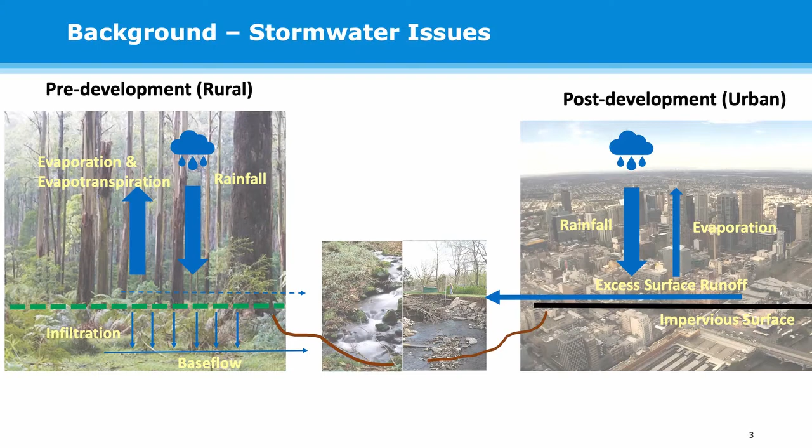Just to start with some stormwater issues, in the natural environment on the left-hand side, the rainfall is largely infiltrated through the pervious surface, such as grassland, and forms the environmental baseflow downstream. Only a small amount of water remains as surface runoff. However, in contrast, in the urban environment on the right, this natural water cycle is heavily damaged and changed. The impervious surfaces we build, such as roofs and roads, stop that infiltration process. Most of the water becomes surface runoff, and this not only causes serious urban flooding issues, but also depletes the environmental baseflow and damages the natural habitats.

One solution to cope with these changes is using stormwater control measures, such as rainwater tanks. Rainwater tanks have multiple objectives. Conventionally, they are a source of water, collecting the roof runoff and supplying the water needs in the house. Because they reduce the amount of roof runoff, they also have simultaneous benefits of mitigating the flooding risk in our urban environment. By installing a small trickle release to these tanks, making a passive release system, they can also restore the baseflow for our streams.

However, we're increasingly seeing real-time control or smart technology applied in our water assets to make them smarter. So one overarching question for us is, can we enhance these benefits by making the static rainwater harvesting systems smarter using real-time control technology, and enhancing all the benefits, especially the baseflow?

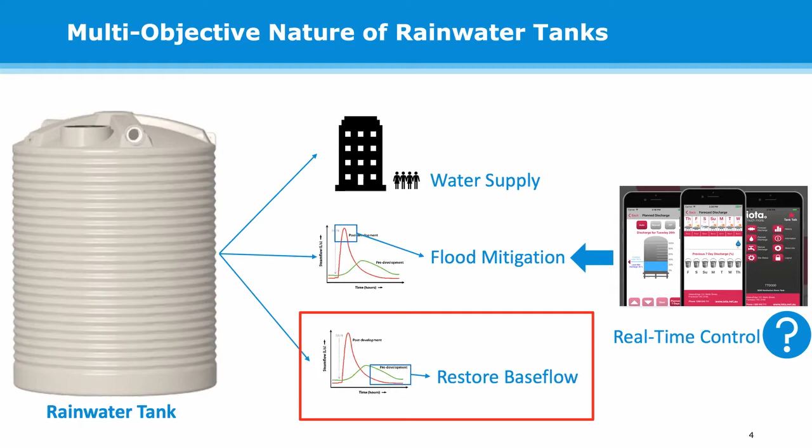So we design a smart control, and how does this system work, you may ask? So first of all, this system normally harvests the rainfall forecast data from the local Bureau of Meteorology. By receiving this forecast, the system would review the tank levels and ask whether this forecast rainfall would fit in those empty spaces. Then the system would start calculating whether you need to empty additional room to contain those forecast inflows.

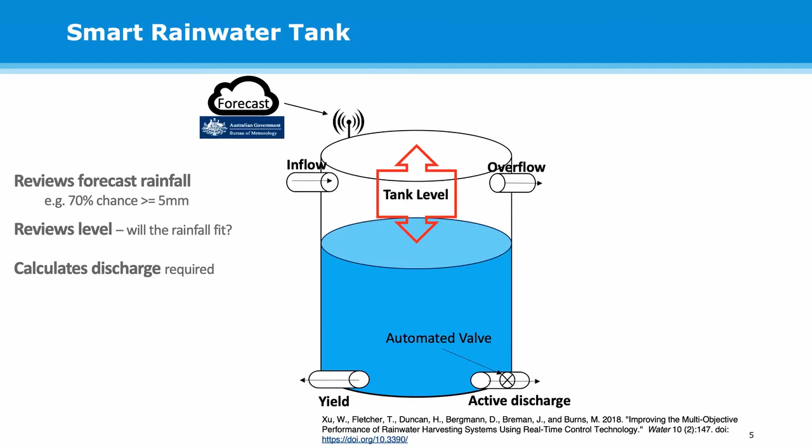So after making those calculations, the system would then perform a quick discharge, what we call pre-storm release, to empty the tank on a daily basis. And this type of discharge happens quickly with the sole purpose to reduce the flooding risk. We also design another type of automatic discharge, what we call the base flow release. In contrast, this release performs slowly and more persistently with the aim to restore the base flow in our streams.

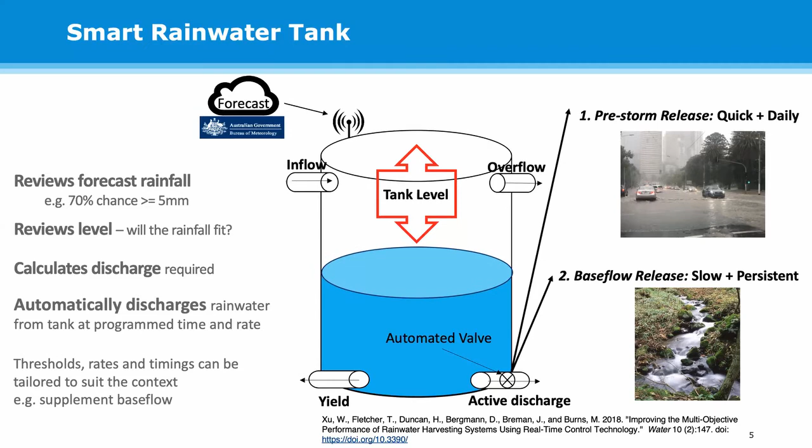So we want to figure out how this system performs. So we built up a model to test the effectiveness of these systems. So we model a range of tank and roof sizes using the smart control that we design. We assess the performance across water supply, flood mitigation, and base flow restoration. And in those modeling studies, we found using this smart real-time control can enhance the environmental flow performance of the rainwater tanks, as well as increase the stormwater retention performance, but only cause a little detriment to the water supply. And this work has been published in 2018 in the Water Journal.

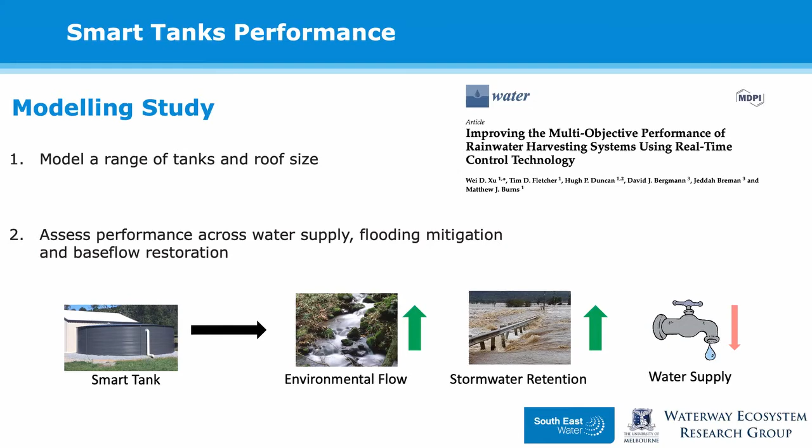After that, we then ask ourselves, all right, so you've already proved this concept in the modeling world, how would this performance look in the real world? So we really want to figure out a proof of concept in empirical studies. So we partnered with South East Water and set up a trial site in one of the residential houses. We install all the real-time control equipment and monitoring in order to get a full understanding of how these tanks work. So we have real-time monitoring of tank level, inflow, overflow, tank discharge, and rainfall as well.

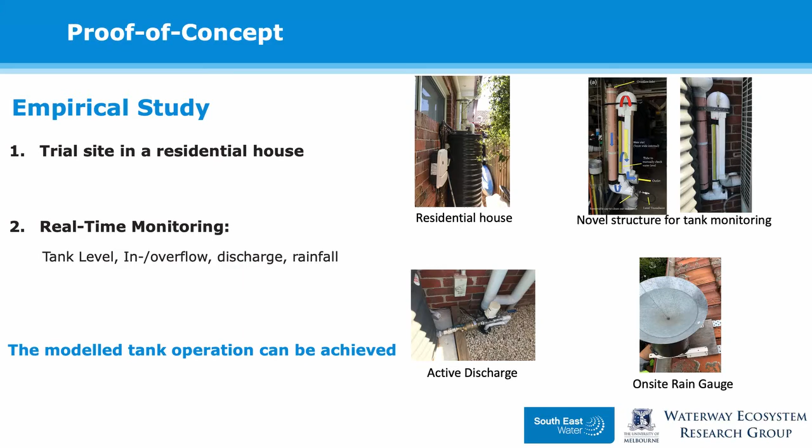And it's quite challenging to monitor the tank inflow and overflow. So in that study, we also designed some novel structures to monitor the tank water flows. And one of the conclusions we have in that empirical study is that the modeled tank operation can be achieved in real-world operation.

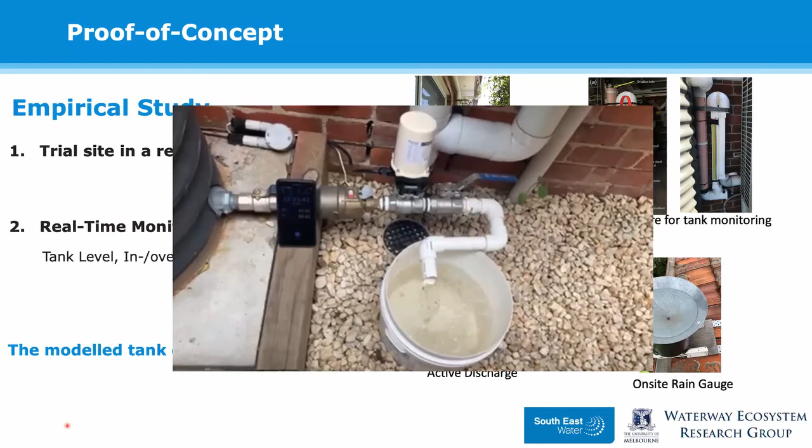After that, we also think, so we've already known that using this technology can really give benefits to the rainwater harvesting system in multiple objectives. How can we make this control even smarter after that? So we are investigating, can we use a more long-term rainfall forecast to make the control more effective? So in this study, we're also asking whether we can advance this smart control using a longer period rainfall forecast.

So we adopt the 7-day rainfall forecast from the Australian Digital Forecast Database, and we developed a model which allows you to generate a discharging plan. And this model is run continuously to optimize on a rolling forecast. The model would then demonstrate how effective the different strategies generated are for multi-objective outcomes. So from the chart over here, you can see you're receiving the forecast at this blue window here. Based on the algorithm we designed, it's generating 4 different discharging plans with different design purposes to perform a discharge in the next 7 days.

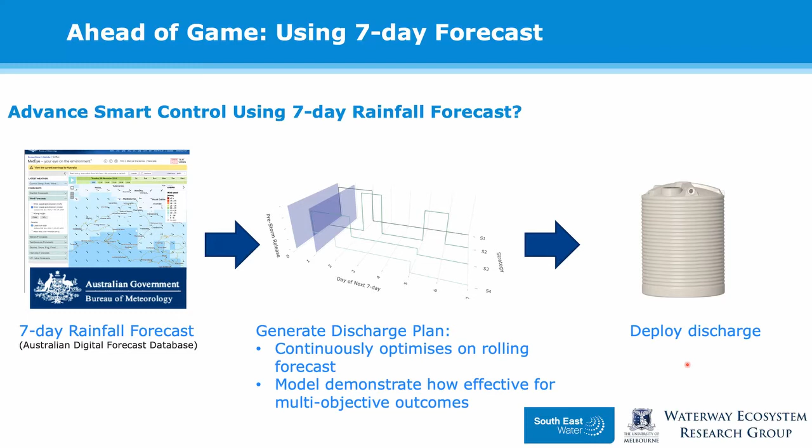The different preferences of the objectives include flood mitigation. So some of the strategies have really high priority in mitigating the flooding risk, and there are other strategies that prefer to release the water over a longer period, but at a lower rate in order to protect the downstream habitat. The generated plan is also modeled by the tank model in the long term in order to assess its performance over the long period, and how this discharge would look compared with the other smart control.

All right, so this is the modeling. This modeling is done in a 6-minute time frame, using one specific event to demonstrate how this system performed in a 20-year event on 27 January 2016. The top figure is the rainfall in this period, and the bottom figure shows the outflow in this period. The green line here is our real-time control technology using the 7-day forecast, while the red line demonstrates conventional rainwater tanks.

What it does with real-time control is the system receives the forecast on the 23rd of January and decides to release some water ahead of the rainfall actually occurring, which is on 27th January. The discharge is finished on the 24th and it goes back to a low discharge for the environmental base flow. However, this discharge is then adjusted due to the forecast error as the date gets closer in order to mitigate the tank overflow. So on the 27th January, the real-time control tanks don't have any overflow and successfully contain all the runoff. However, in contrast, the conventional tanks just overflow, just spill all those inflows during the rainfall.

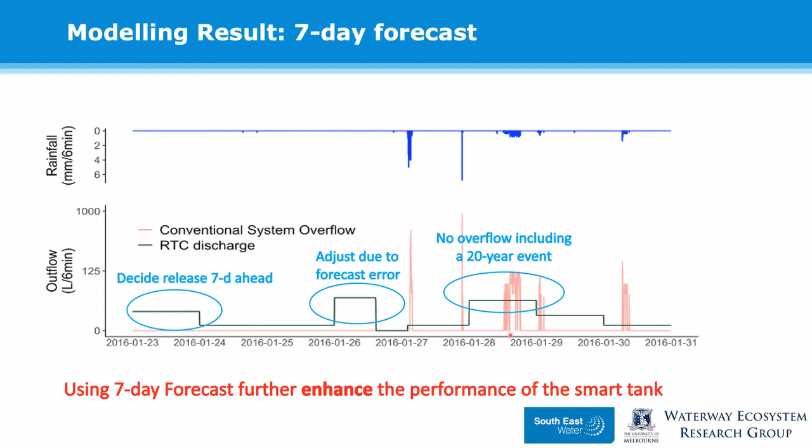Also, because of this rolling window and you are consistently predicting for the future, the overflow in the 20-year events is also being mitigated. After the tank is mitigating all the flooding risk, they go back to the duty to restore the environmental flows when there's no risk of flooding. What we found in this study is using a 7-day forecast further enhances the performance of the smart tanks.

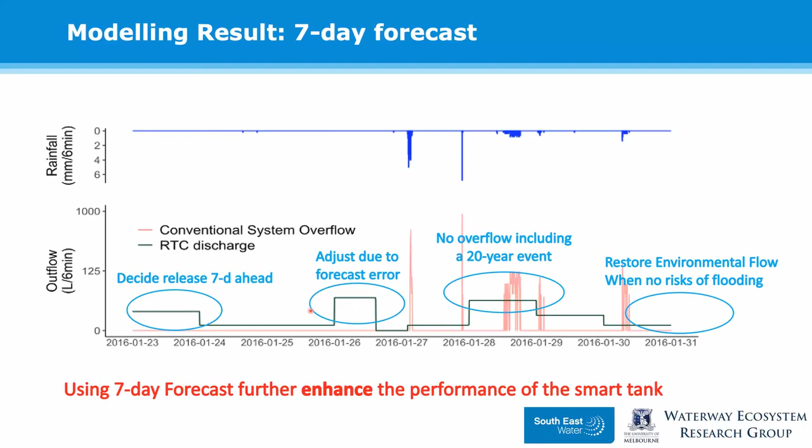We're also looking at what's the impact of the smart control over long-term hydrology. So here are the flow duration curves of all the scenarios we modeled. We also compare with the conventional system, which is shown in the red line. We also compare with a reference stream flow, which is one of the Melbourne Water flow gauges at Monbulk, as a comparison group.

So the flow duration curve is a cumulative frequency curve that shows the percent of time a specified discharge was equaled or exceeded during a given period. Here we're really just trying to reflect how our controlled discharge affects our flow regime and compare to the others. All you want to look at with this chart is the trend of it.

So if we're looking at the bottom left one, you can see that by equipping the rainwater tanks with smart control, the peak flow is largely decreased. And although it still has distance from the natural stream flow, you can mitigate a lot of peak flow in the urban environment. And look at the bottom right chart, you can see the real-time control can also successfully restore the base flow, delivering a base flow that's higher than your reference stream.

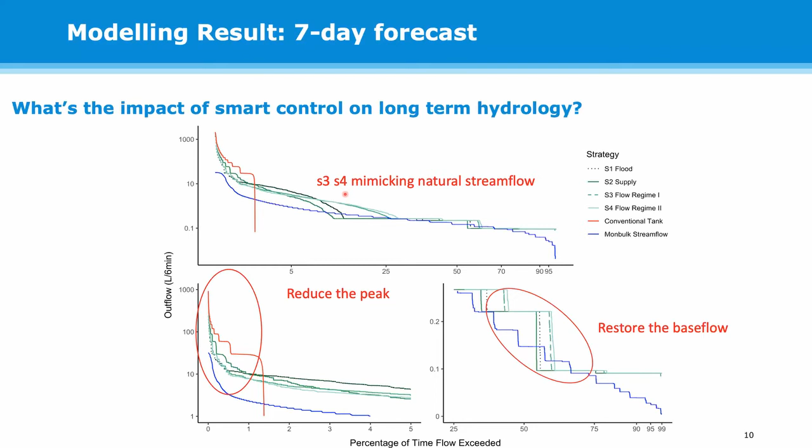What is really interesting over here is these two green lines, they actually mimic the trend of the blue line, which is the natural stream flow. And we found that by using this technology and all the strategies that we designed, this technology can potentially restore the flow regime of the natural flows, which demonstrates its ability to manage stormwater in a more environmental way in a range of contexts. And this research has been recently published in one of the top international peer-reviewed journals.

All right, next, Dr. Matt Burns will join me to present how this technology can be upscaled in the Monbulk catchment. Over to you, Matt. Thanks, Daniel. That's a really great job.

So Daniel's done some really great work, both empirically and in a modeling sense, showing that if we put real-time control technology on rainwater tanks, they can obviously provide a water supply benefit, provide a flood benefit, but also provide an environmental flow benefit. And that's a really innovative part of Daniel's work and use of this technology. So we've been working with Melbourne Water to deploy real-time control technology throughout the Monbulk Creek catchment.

And so the Monbulk Creek catchment is a fairly peri-urban catchment. For example, the township of Belgrave is in the catchment. A couple of interesting features about it include two big public storages. So there's Belgrave Lake there in the middle, which used to be a water supply reservoir, and also Birdsland Reserve, which is primarily a retarding basin.

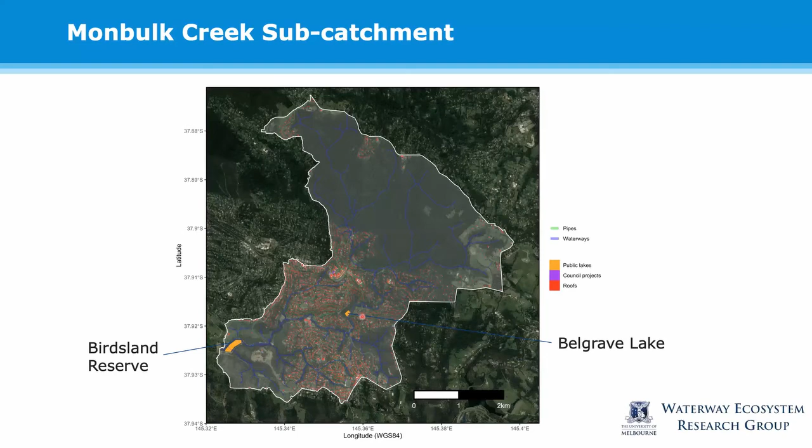So there's these two big storages, and there's also this mix of private and public properties, and there's this huge potential to deploy real-time control technology at the private scale, so individual households, at larger scales, so businesses, schools, other council buildings, and also deploy this technology on these two big public storages. So some of you are probably thinking, what's this great interest in Monbulk Creek? So if you go to the next slide, Daniel.

One of the key drivers of why Monbulk is that there is a platypus population that lives within Monbulk Creek. It's one of the last remnant platypus populations of the Dandenong system, I believe. And this particular platypus population is at risk of extinction because of stormwater runoff, all the stormwater that's generated from the Monbulk Creek catchment, but it's also at risk because of climate change.

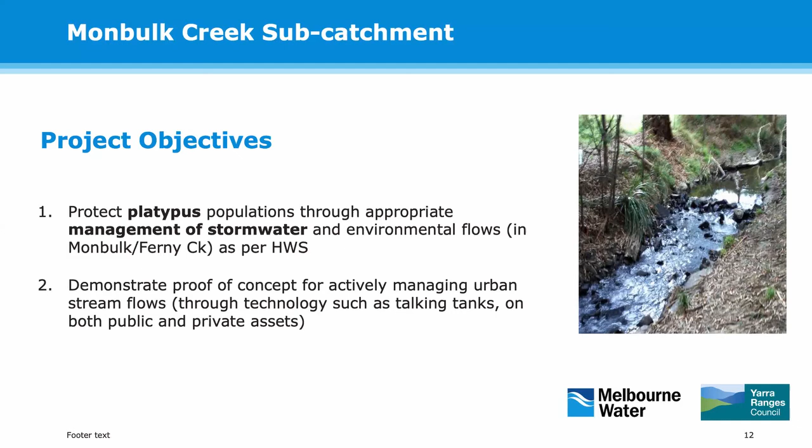So climate change is predicted to reduce rainfall, which will reduce stream flow, and so there's a potential that particularly during dry weather periods, so particularly during these warmer summer and autumn months, with the change in climate there's going to be less water in the stream. That means less physical habitat, and that could in turn reduce food supply to the platypus and then start stressing them.

And so there's this really exciting potential to put these smart tanks all through Monbulk Creek, so houses, schools, council buildings, and these two big storages, and to use the technology in a really sophisticated way to ensure that we can provide the right environmental water for the platypus at the right time.

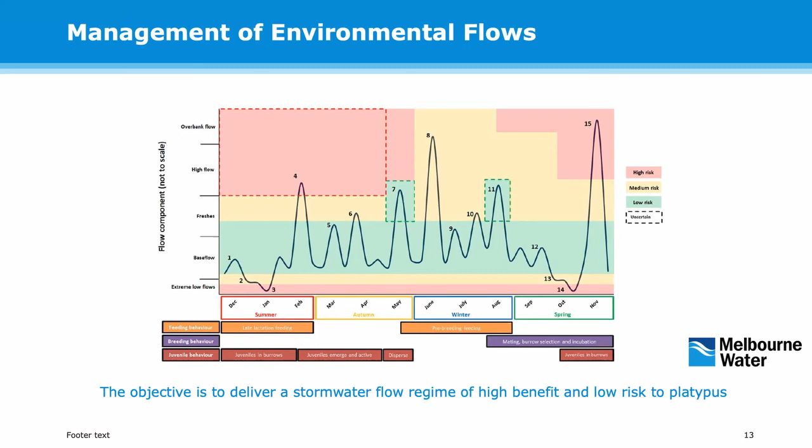So you can imagine that with these tanks, we can control the smart network to build up water in these storages and then release it in this particularly important autumn period when the platypus need it. So again, following on from Daniel's work in using technology to provide an environmental flow that matches the requirement of the ecosystem, which is really exciting and innovative. The next slide.

And so we have sort of thought with this project about concepts like an individual household having a rainwater tank with real-time control. It's a really dry period. Stream flow is getting low. Physical habitat for the platypus is getting low, but they've got water in their tank. And potentially they could have a smart app. They get an alert saying, "Hey, the platypus need water. Would you be prepared to release some of your water from the tank downstream, so that water can be stored in some of these big storages and then released downstream, or released directly to the waterway?"

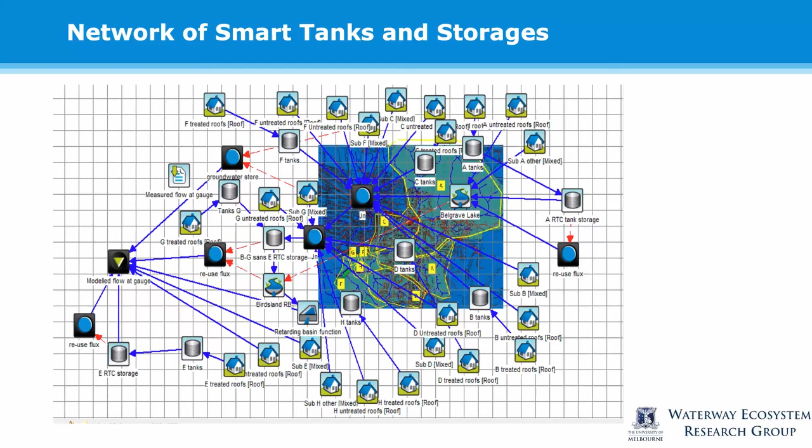There's also economic questions as well. So maybe if a resident has a tank full of water, it's dry, and the receiving water would really like some, could a resident be financially rewarded by releasing some of that water? So this kind of public-private interaction with water raises some really interesting questions, and potentially opens up whole water markets, issues around community perceptions, those sort of things. So, next slide there.

And so I guess the current status of this project is that Melbourne Water, in conjunction with Yarra Ranges Council, the local municipality, and South East Water, the water retailer, are actively working on the business case for this project, and we're actively in the process now of working out exactly how we could retrofit Belgrave Lake with the smart technology, so we can control water level and release water when we need to, and the same for the retarding basin much further downstream.

So this project is not a pipe dream. We're really in the process of doing some functional design, and hopefully in the next couple of years we can start deploying some of these smart tanks out in the community. And it's particularly important to provide this proof of concept to hopefully roll out smart tanks in other places.